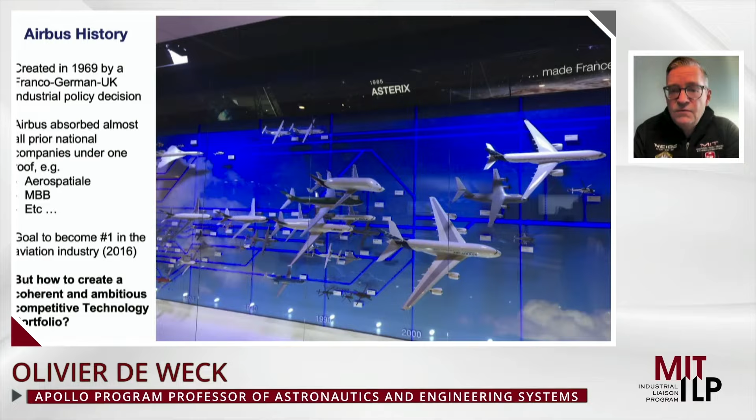The challenge was, how do you create a coherent and ambitious competitive technology portfolio? The picture on this slide I took myself at the Company Museum of Airbus in Ottobrunn, south of Munich. I love this family tree that shows you some of the epic products, like the Concorde, a supersonic aircraft, the Airbus 300, the A380, and the latest one is the A350.

I often get this question, what is a technology roadmap? The simplest way to explain it is shown on this graph. It has the products at the top in red. Products come in different product lines, so each horizontal line could be a different product family, could also include services. Then in blue below that, we have the technologies that either enhance or enable these products. Technologies also come in multiple generations; they improve over time.

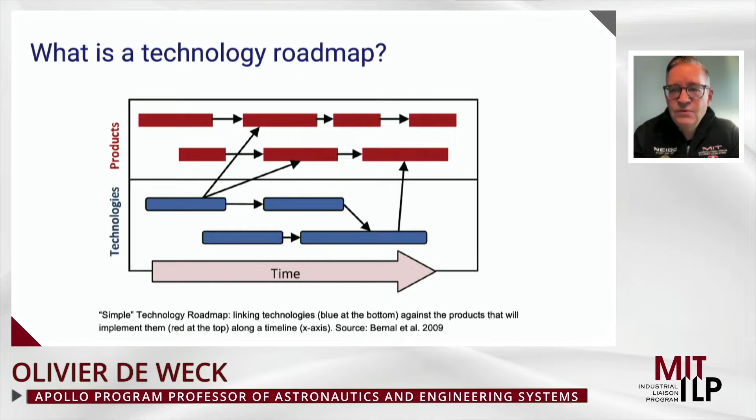The most interesting are the diagonal arrows on this chart. This is the infusion—these are the infusion pathways for technologies to be infused into their parent products. This shouldn't just be one chart that somebody creates intuitively; there should be a lot of thought, discussion, and analysis behind creating a technology roadmap, because each of the blocks shown on this chart could represent many millions or even billions of dollars of investment.

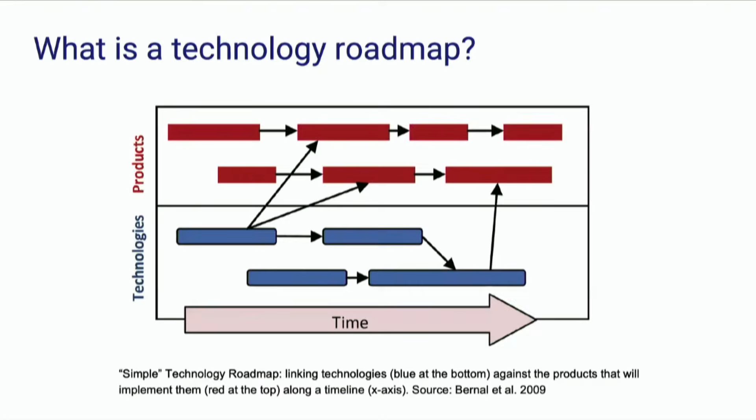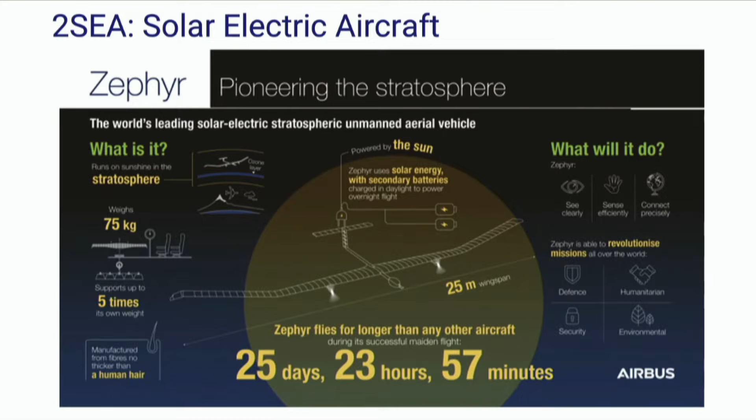So to go into more detail, what should a good technology roadmap look like? We created an example using a product that is not yet a fully established market—let's call it a proto market. And that's the market for solar electric aircraft. What's shown on this chart is the Zephyr.

Zephyr actually started as a university project in the UK. It's a solar powered aircraft that can fly in the stratosphere, about double the altitude of commercial aircraft, and can provide missions like reconnaissance, imaging, and communication relay for disaster mitigation, things like that. The world record was established in 2018 for nonstop flight without burning a single drop of fuel—26 days, almost a month. That world record has since been broken by Zephyr itself, and it's currently over 60 days.

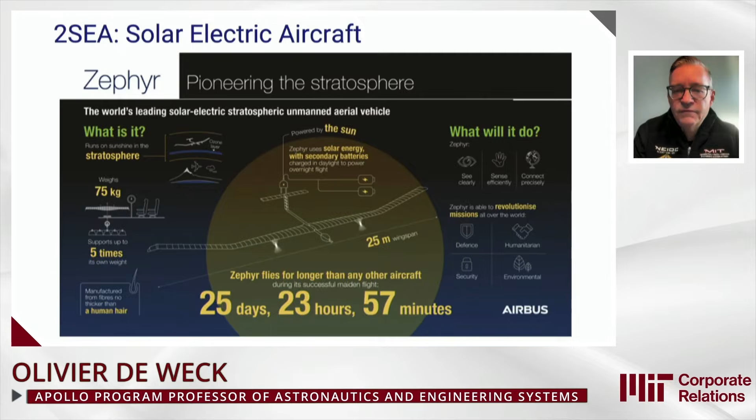So imagine flying in the stratosphere for 2 months, nonstop, without burning a single drop of fuel. It's really impressive. So how does this technology evolve? Where should it evolve? And what does a technology roadmap look like?

Here on campus at MIT, I teach a course, Technology Road Mapping and Development. I've been doing that for about 3 years. Students develop a technology roadmap on any technology they're interested in. So Pierre was talking about generative AI, for example.

Absolutely, that's within scope. Some of these are physical technologies, also life sciences. Pierre mentioned the emergence of Cambridge as a life science cluster. mRNA vaccines is another example.

We had a roadmap last fall on artificial meat, lab-grown meat, which has been around long enough to actually have a track record and figures of merit. So there's a roadmap for lab-grown meat, if you're interested in that.

using OPM, object process methodology. It's an ISO standard language, ISO standard 19450. What are the figures of merit that you use to judge the technology, to quantify its progress?

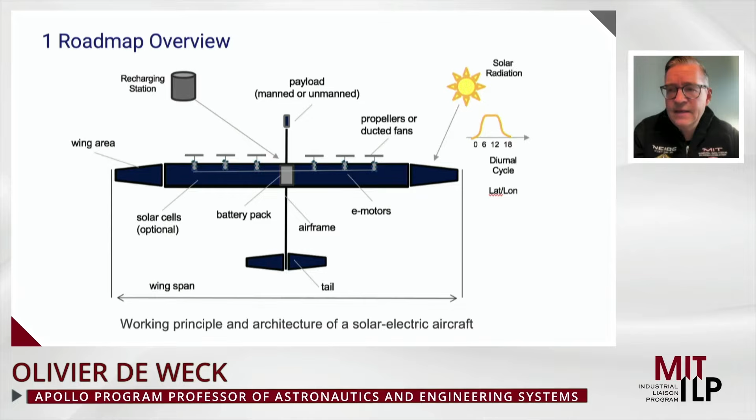Right now, I'm looking out the window here in Cambridge, and it's a bright sunny day. Sunrise was at 6:40 this morning, and sun is going to set at 5:15. So still, the sunlight is less than 12 hours in the day. And so the latitude also matters where you're flying.

Let's jump to section 4, figures of merit, FOMs as we call them. How do you judge the quality, the performance, the cost effectiveness of this technology? Unit cost, operating cost, maximum payload, and endurance.

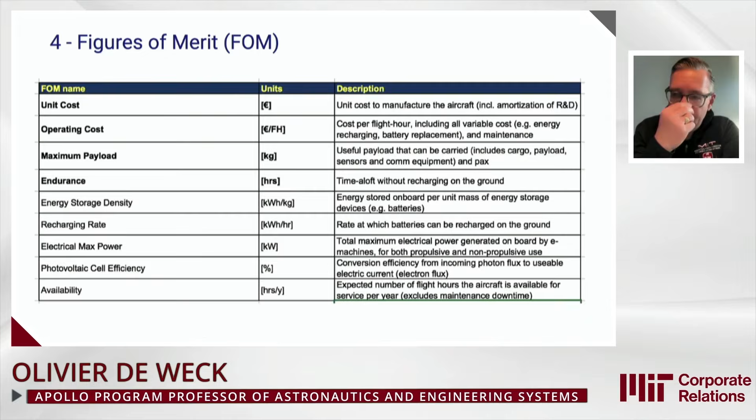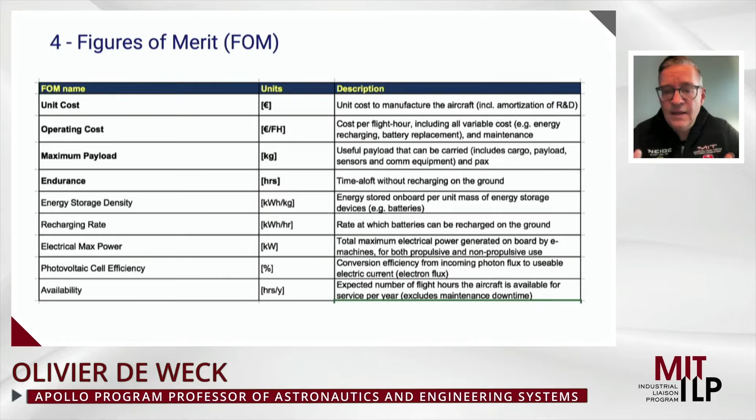The 4 figures of merit shown in bold are the key ones that the market, which is an emerging market, uses to judge competing products. Below that, we have other figures of merit that are more internal: energy storage density, the recharging rate, the max power of the engines, the photovoltaic cell efficiency, and the availability. How many hours per year can you actually fly?

Siemens has produced a very powerful electric aircraft, but it's primarily for aerobatics. The Airbus EFAN crossed the channel from England to France several years ago, for the 100-year anniversary of Blériot's first crossing of the channel. The Pipistrel Alpha Electro is actually a production aircraft made by Pipistrel, a quite successful company in Slovenia that makes small electric trainer aircraft. Solar Impulse flew around the world in 17 stages.

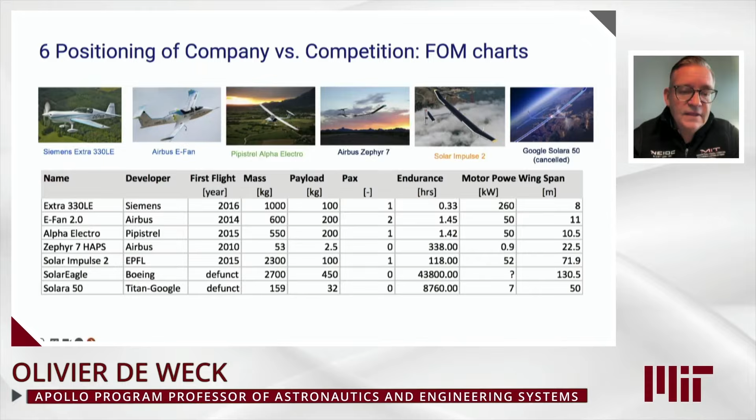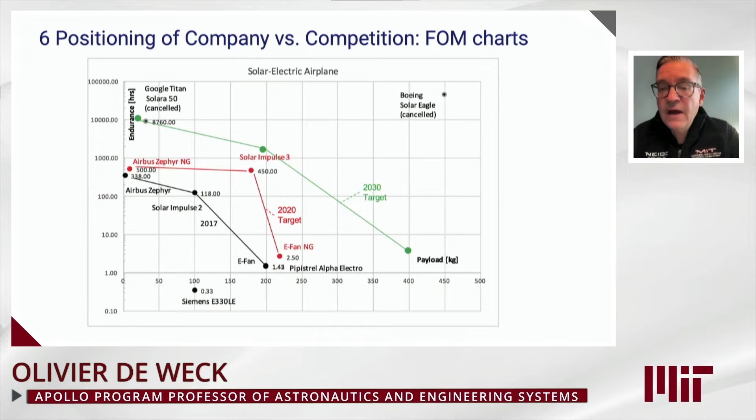What that tells us is that was a utopian target. So one thing I recommend for business leaders and technologists is, yes, you should be ambitious—set ambitious targets—but do not set utopian targets, because they will backfire, consume a lot of resources, and in the end be very frustrating. Part of my mission here in promoting technology road mapping, and a more rational approach to it, is helping you find the right level of ambition. If you're not ambitious enough, you won't be competitive versus your competition. If you're too ambitious, meaning utopian, you'll be chasing targets that are not realistic. So finding the right middle ground is challenging.

Number 9: what are the actual R&D activities and projects we should be doing? For that, you need to rank order technologies—which one is the most valuable, second most, third most. People usually don't like to do that; they don't like to rank order technologies. Who wants to be told your technology is number 9 on the list? Nobody wants to hear that. But the reality is you do have to have this kind of discussion and analysis.

So one way to do this is to build a model of your product, or you could call it a transfer function. On the left side, you feed in the component-level technologies, business as usual versus accelerating their development. On the right, you predict at the mission level, at the market level, how well this product will perform.

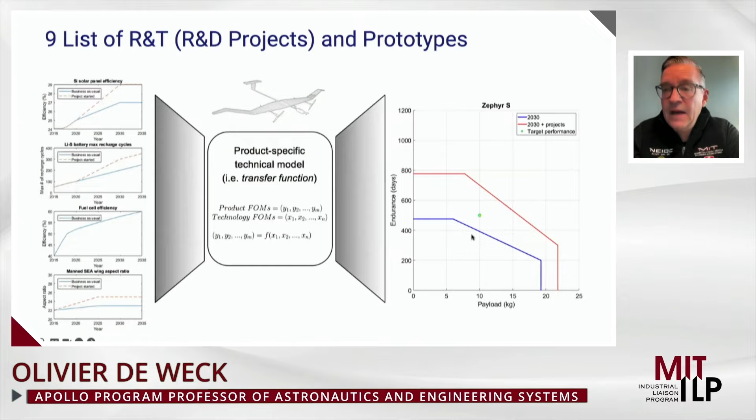You can see the green dot there—that's a specific target for 2030 in terms of payload and endurance. The blue line is what we think is achievable without any special investment, meaning you're just buying COTS, commercial off-the-shelf technologies and integrating them together—and you would miss the target. You would not be able to achieve it with just COTS technologies by 2030. The red line shows the prediction of what's achievable with focused R&D investment. The horizontal line shown here is the energy limitation, the energy constraint, and the vertical line is the power constraint in this particular application.

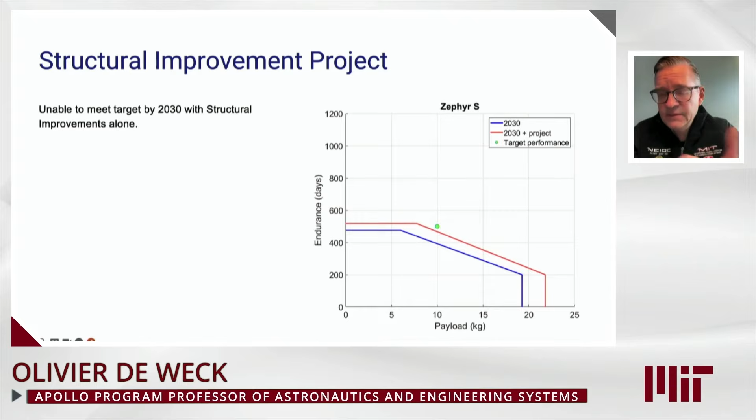We can see that we're unable to meet the target if we do not invest at all in R&D. If we do structural improvements alone, that helps us, further lightweighting, composite materials, for example, but it's not enough. Interestingly, if we improve the solar cells, those thin film solar cells, you might be asking, where's the blue line here? Well, it's hidden behind the red line.

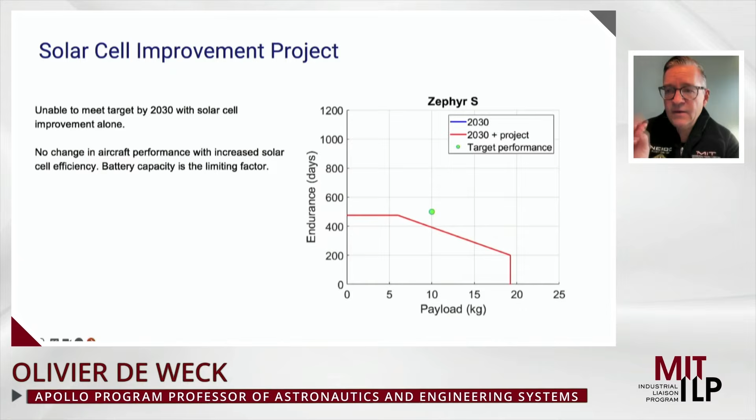Meaning you can invest in solar cell improvement, but it doesn't actually help you at all. And why is that? Because solar cells are already good enough. They are not an active constraint in the system. So any technological investment you make needs to be targeted at a bottleneck, an active constraint in the system, and the solar cells are not the active constraint. What is the active constraint is the batteries, the ability to store enough energy, because remember, you're not landing, you're not refueling, so you have to make it through the night on the energy that you've stored during the day.

So basically, the most important investment here is, in this case, we're choosing lithium sulfur batteries instead of lithium ion batteries. Lithium sulfur batteries have higher energy density, but they don't have as many cycles as lithium ion batteries. So that's where we'll target our investment.

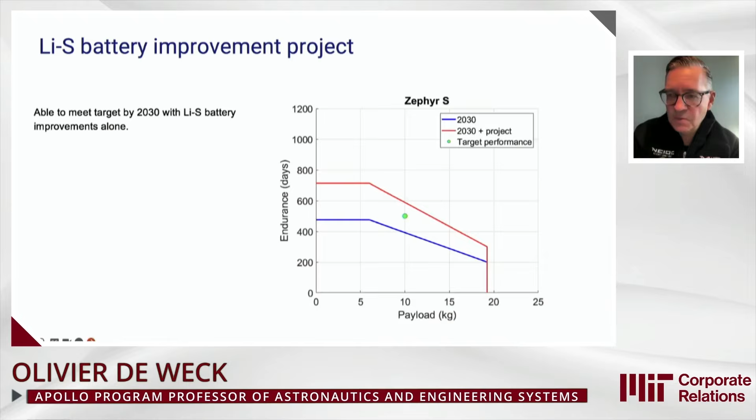And then that leads to section 11, which is our tech strategy: targeted development of a solar-powered, electrically driven unmanned aerial vehicle, a HAPS service platform. HAPS stands for High Altitude Pseudo-Satellite, also another word used for these airplanes. We want to do an entry into service date of 2030. We would like to achieve an endurance of 500 days and a useful payload of 10 kilograms, because that actually provides a valuable service.

To achieve this, we're going to invest in two major projects. One is a flight demonstrator with a first flight by 2027 to demonstrate a full year aloft with a 10-kilogram payload. And our second investment will be an accelerated development of lithium sulfur batteries with our partner XYZ. We would like to partner here with a company that has expertise in lithium sulfur chemistry. And we're going to look at 500 charge discharge cycles and have this technology ready at TRL, technology readiness level 8 or 9, by 2027.

So you can understand now how this tech strategy was derived, not just by intuition or pure discussion, but by careful analysis. Okay, so that's kind of an example of a tech roadmap.

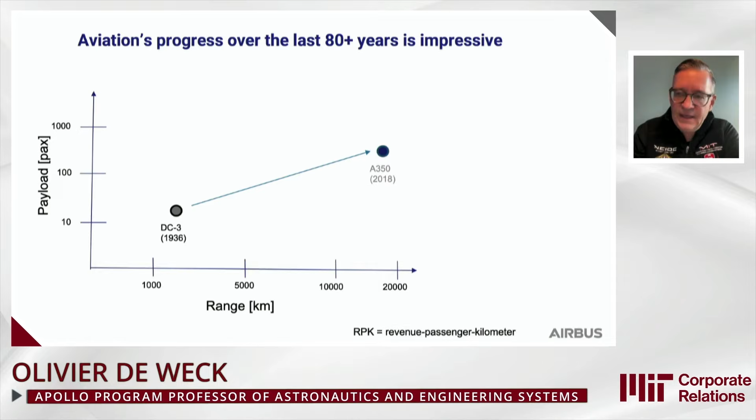By the way, payload versus range, this is the chessboard, the market segmentation of the aviation industry. If we multiply payload by range, we get this figure of merit called RPK, revenue passenger kilometer. And that's what's used in the industry.

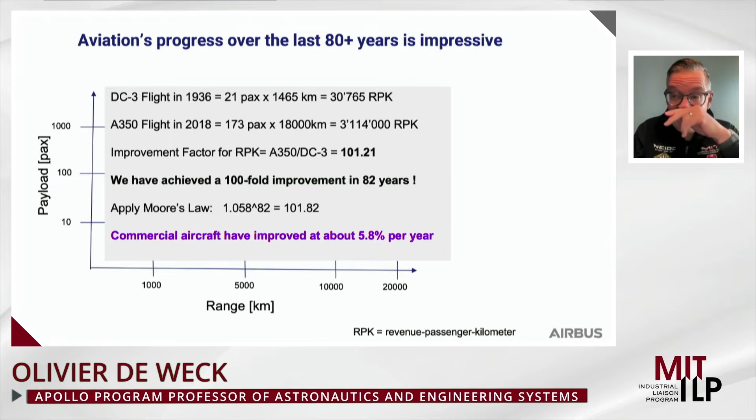So let's do some quick calculations here. A DC-3 in 1936 carried about 20 passengers for about 1,500 kilometers. That's 30,000 RPK. An A350 today carries about 170 passengers over 18,000 kilometers. That's 3 million RPK. If we take the ratio of those two numbers, that's the improvement factor we've seen over 82 years, and it's almost exactly 100. We can say that civil aviation has improved by a factor of 100 over 82 years.

And then if we apply Moore's law to that, the generalized Moore's law says there's an annualized average percent improvement in technologies. It's about 5.8% in commercial aviation. And some of you might say, wow, that 5.8%, that's not a lot, that's not really that impressive. But remember, it's 5.8% on average, consistently, over 82 years. That is really impressive, because it's compounding, like interest in a bank account. That gets you the 100-fold improvement over 82 years. That is really impressive.

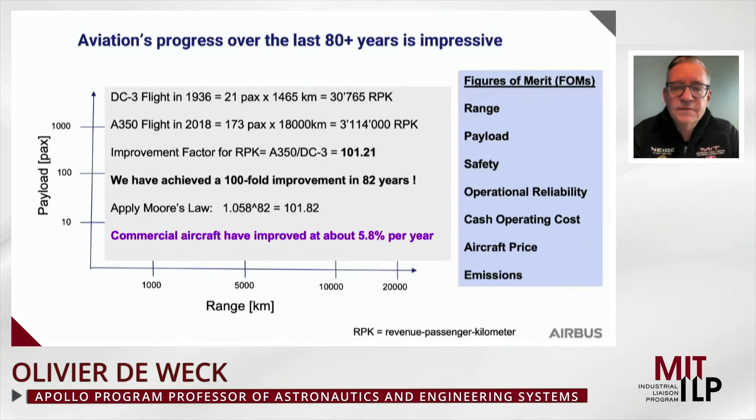And that's for range and payload, but we've seen similar improvements in safety, operational reliability, cash operating cost, and the new battleground. This is when disruption happens in industries: when the key figures of merit shift.

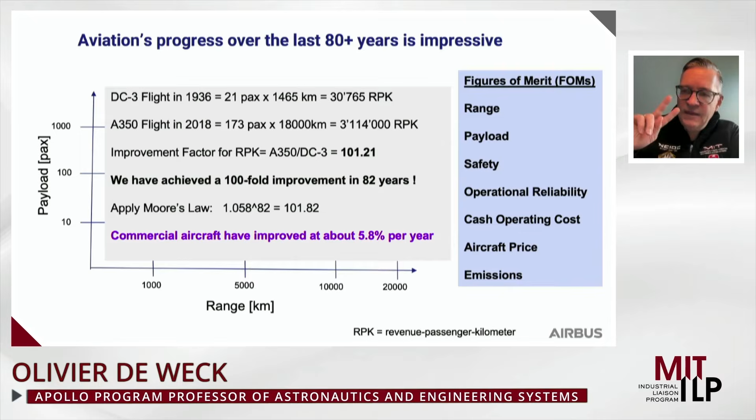The new battleground is going to be emissions, the sustainability.

I promise you not too many equations, but this is an MIT ILP seminar, so we have to have at least one equation here, right? You got to drink a little bit from the fire hose.

This is the first equation that we teach in our department, the famous Breguet range equation. Breguet was a French aviation pioneer. He was a pilot, an aircraft builder, and a scientist. He derived this equation from scratch, which predicts the range of an aircraft burning fuel as a function of different factors, like how much energy per mass of the fuel.

Earth's gravity, we can't change that. We have, by the way, flown on Mars now, right? So if you did this for Mars, you'd have to replace Earth gravity with Martian gravity in this equation, which is about 38% of our gravity.

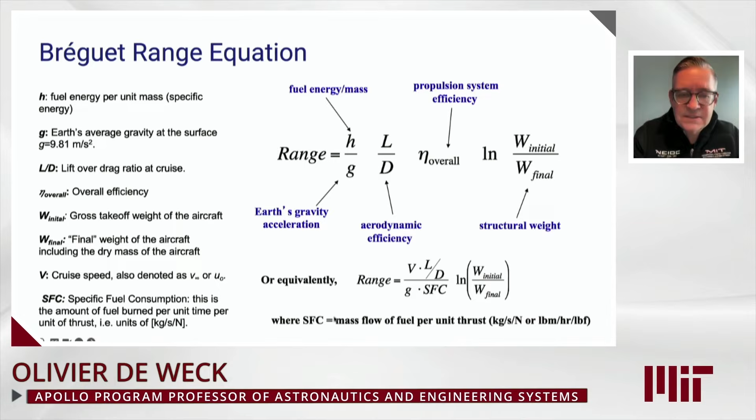L over D, lift over drag, aerodynamic efficiency, propulsive efficiency, and structural efficiency. We can rewrite this equation using SFC as a parameter. SFC is the mass flow of fuel per unit of thrust. I'll come back to that in a second.

So the question is, a 100-fold improvement in aviation in 82 years, who deserves most of the credit for that? Structural people, aerodynamicists? Well, the answer is propulsion, air-breathing propulsion, people working on engines. 60% of the improvement is due to engine improvement.

This chart shows, in this case, the y-axis is lower is better, meaning less fuel consumption. The horizontal axis shows normalized complexity. Complexity of these engines is a function of the number of components, their interfaces, and the interactions between the components. So we've gone from turbojet engines, where all the airflow goes through the core, to single stage to multi-stage engines, and we've created bypass flow engines.

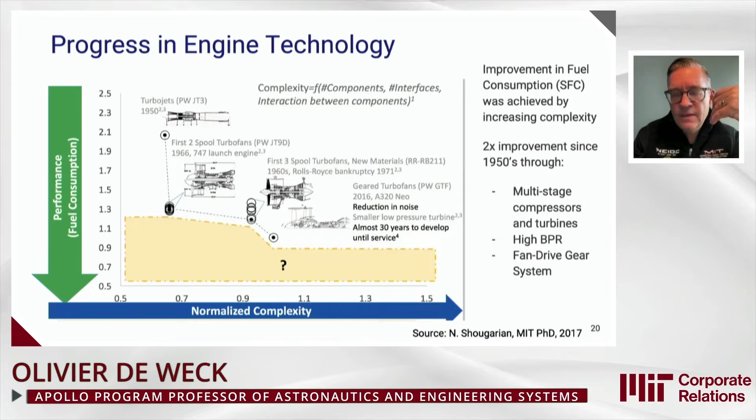Typical bypass ratio in this day and age is 10-to-1, so most of the flow goes around the core. The latest generation are the so-called geared turbofans: more performance, more efficiency, but we had to buy that with a lot more complexity.

This is what one of those new engines looks like, the geared turbofan. This particular version is created by Pratt & Whitney, not too far from MIT in Connecticut. The magic sauce here is in the front of the engine: a gearbox that decouples the low pressure spool from the fan.

It's a 3-to-1 reduction ratio, but it also has a lot of additional software, lubrication, and so forth, and that's really what allows this efficiency. That also led to a huge commercial success for Airbus with the A320neo new engine option family.

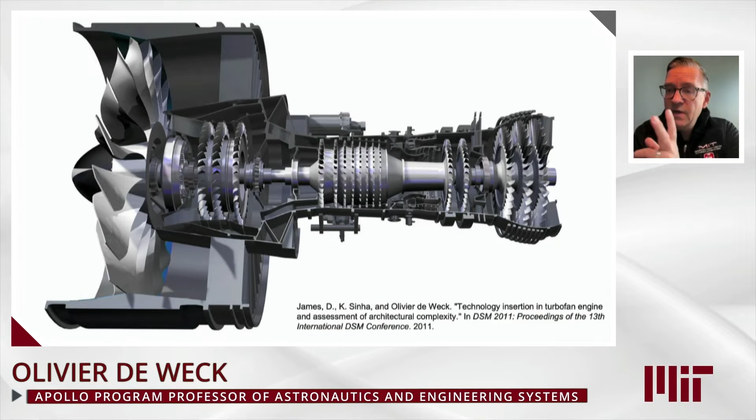We've looked at technology progress over time in quite some detail. When you look at it for these air-breathing engines, as one example of technology, you can see a flattening curve. What the flattening means is that as the technology matures and gets better, it gets more complex, and every percent of improvement we're trying to achieve costs us more and more in additional complexity. So as a technologist, a company, a business, you should be aware: where am I on this particular curve?

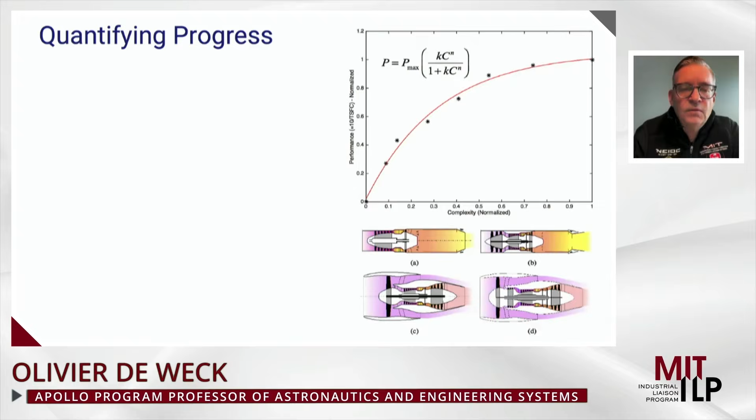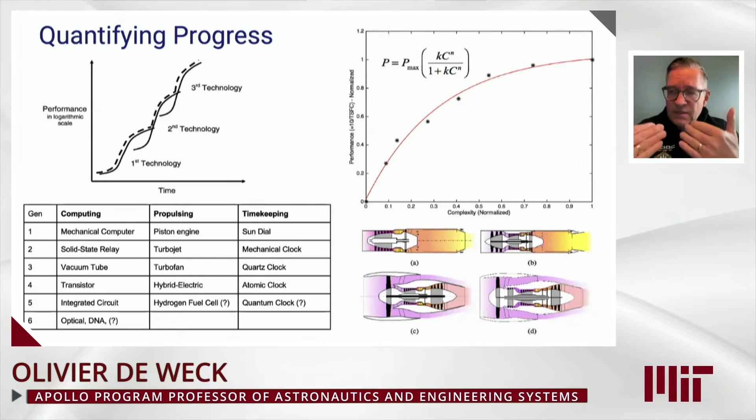Why is that important? It's because when we think about technological disruption and displacement over time, technologies start substituting for each other. One model for that, which I personally believe is correct, is these S curves. Every technology has an S curve. One of the key questions in technology strategy, which is really the topic of this webinar, is: when is it time to switch to the next S curve? Because if you wait to switch until it's already clear the crossover has happened, it's too late, you're not going to be a leader. You need to pre-invest before the switch actually happens.

So here are three examples of these S curves. In computing, we went from mechanical computers to solid state relays, vacuum tubes, transistors. Today we're in the age of the IC, the integrated circuit. What's the future of computing? Optical, DNA, quantum, question mark. In propulsion, we just talked about it: we had piston engines initially, then turbojets, then turbofans. Now we're moving to hybrid electric propulsion, and perhaps the future is hydrogen fuel cells.

Peter, our host here, is Swiss originally, and so am I. And as you know, Peter, what are people in Switzerland obsessed with? Chocolate and watches, I guess.

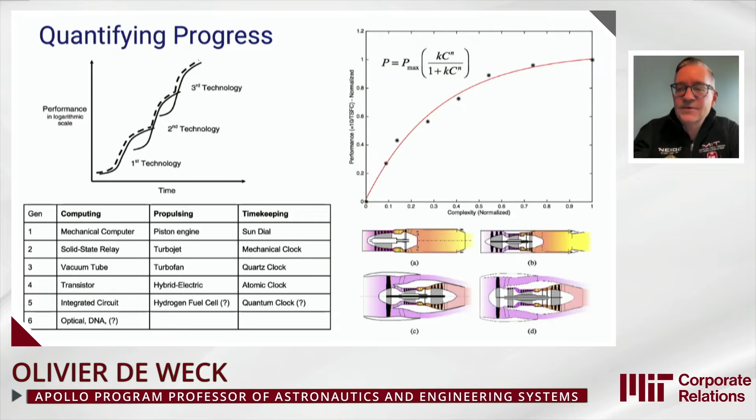Right. One thing you learn in Switzerland when you grow up is be on time. Do not be late. Being late is a capital offense. So timekeeping is essential. So here are different technologies in timekeeping: sundials, mechanical clocks, quartz, atomic clocks, and now we have quantum clocks, right?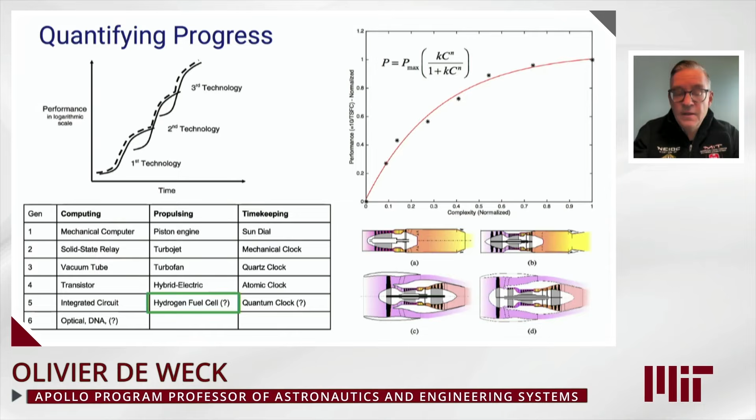And so this is really the question, is these S curves. So let me show you one of the big topics at Airbus when I was there, and it's still a big topic: what about hydrogen replacing kerosene as the primary fuel? Is that going to happen? Should it happen? Who's going to be leading that? And Airbus clearly decided to be a leader in hydrogen propulsion. Maybe it won't happen, but if it does happen, it's better to be the leader than be the follower.

And so I wanted to show you this program here, the Zero E program. Zero E stands for zero emissions, which is really what came out of our technology road mapping efforts using this approach. There are 3 platforms under development: a turboprop, a blended wing body, and a turbofan. They tend to be for the shorter to mid-range. And a lot of investments are going into hydrogen-based aviation these days.

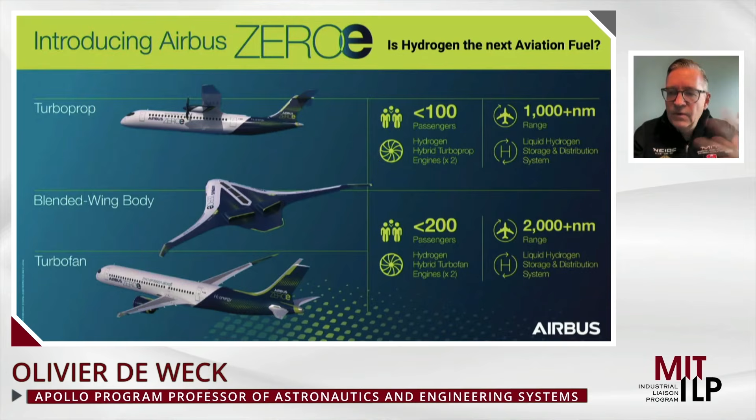And I just want to show you a very short, kind of promotional video just to show you how cool this is and what those platforms might look like. So hopefully this will work.

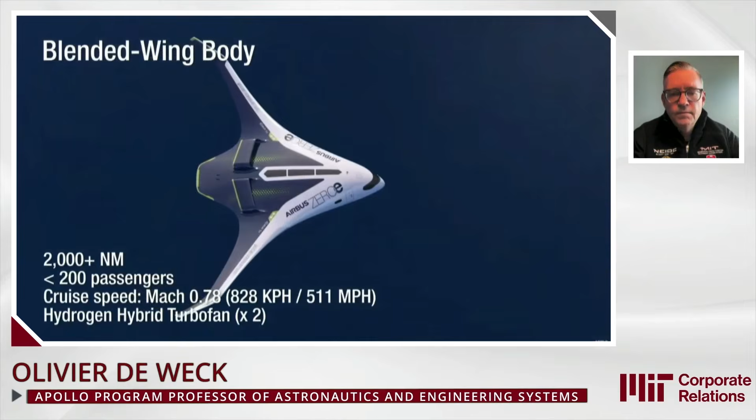Okay, so 2035, that's like 10 years from now, 11 years from now. That's the anticipated entry into service of this new technology.

So to wrap up, because I know we probably have some questions, Peter. This is in a nutshell the framework, this technology road mapping and technology planning framework that I've developed and that we implemented at Airbus. And I'm working with several other organizations now, including NASA, Draper, and some commercial companies as well, on implementing this approach. 4 key questions in the center.

Where are we today? Where could we go? Where should we go? Where are we going? On the left side, you feed that with a clear decomposition of products, services and technologies. You map them. Human input. This is not just a kind of a black box magic. Technology scouting, IP analytics, and your human experts are critical as well. And then the company's strategic drivers feed into it.

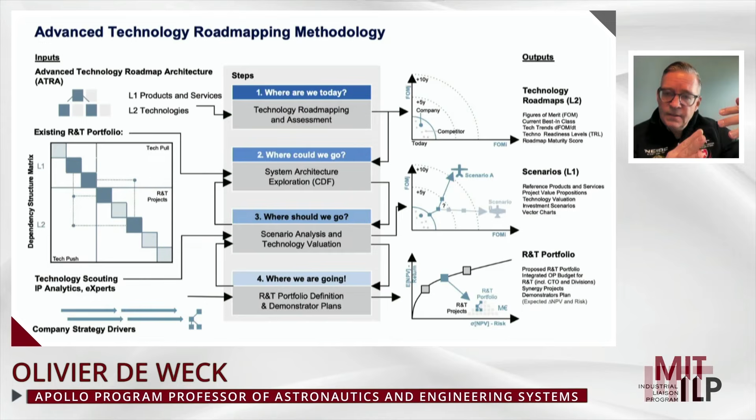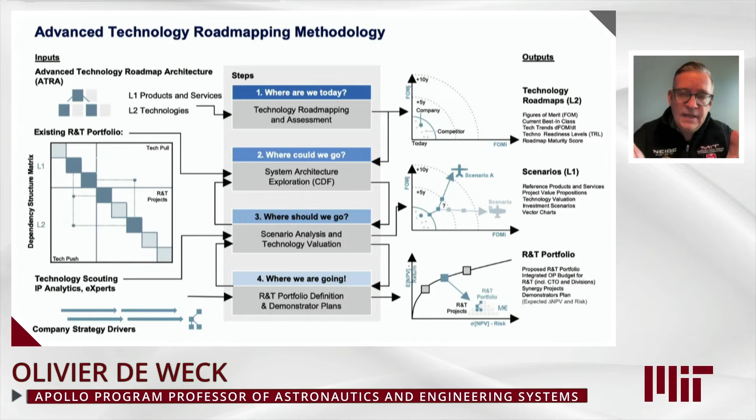On the right side, you get your outputs. So these charts, these roadmaps, show where we fall as a company, who our key competitors are, whether we're ahead, behind, or about even when it comes to these figures of merit. Different scenarios, scenario A, scenario B. Scenarios will scramble the rank ordering of technologies. If you think about high fuel price, low fuel price, with carbon tax, without carbon tax, that has a big impact. And then finally, in the lower right corner, your Pareto front, your efficient frontier of different portfolios, some more conservative, more incremental, or more ambitious.

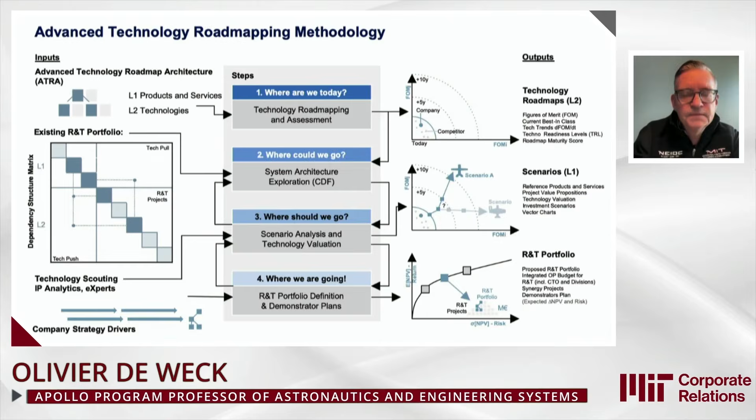So to conclude here, I hope you got some insights into what technology road mapping is, and what a roadmap should look like. Many of the examples that I gave you are from aerospace, but it applies pretty broadly. And so if you haven't seen the book, it came out in June 2022. It's done pretty well, and I'm happy to answer any questions you may have.

Great, thank you, Ollie. Really excellent, and I like the instructive examples. So we got a couple of questions here. I think I'll just go in the order they came in.

The first one is actually very interesting, a very pointed question: how can your skills be applied to direct air capture, since we need to go back to the original 0.027% carbon dioxide content until 2050 to have a lively world for our children?

Yeah, it's a great question. And so it so happens that direct air capture was a roadmap that was developed as part of my class. I'm going to a website here, if I may - this was unrehearsed, so if you don't mind, I'll just share this with you right now. I put a link in the chat. This website looks kind of like Wikipedia, but that's what we use with the students as well to create their roadmaps. They can choose any technology that they're interested in.

You can see the carbon abatement costs. I invite you to go through this direct air capture roadmap, which has a 4-level hierarchy of technologies. There are several different methods for capturing CO2, each with certain advantages and disadvantages. Eventually, what we care about are the figures of merit: dollars per ton of CO2 captured or removed from the atmosphere, the scale of a plant in gigatons per year, how much energy it takes to remove the CO2 in gigajoules per ton, how much land demand is taken up for CO2 removal, and what's the efficiency of the process.

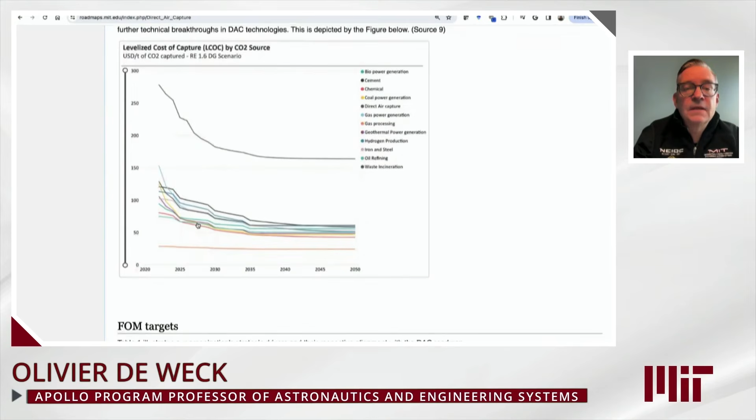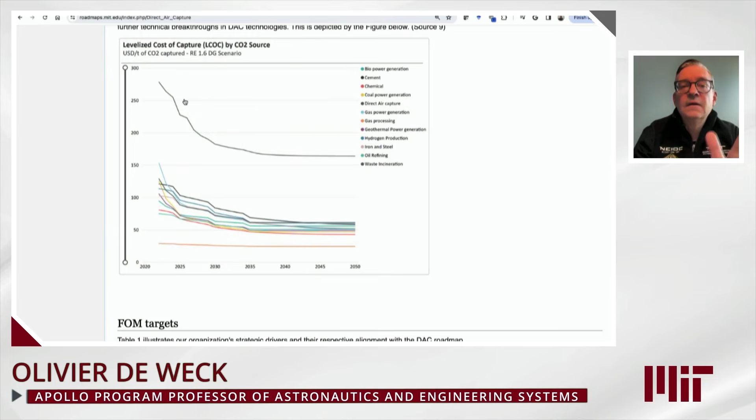You can see the predictions here for the levelized cost of capture. We talk about LCOE, levelized cost of energy, and here it becomes LCOC, the levelized cost of CO2 capture. I don't want to go too deep into this, but you're welcome to take a look at this direct air capture roadmap.

Could you actually bring road mapping to almost the next level, to apply it to climate change? What do we need to do to get back to the CO2 levels we want to be at in 2050, beyond direct air capture? I think climate change as a whole is probably a bit too broad -- that's a global challenge that needs to be decomposed. But what I feel comfortable saying is that we can group and classify technologies.